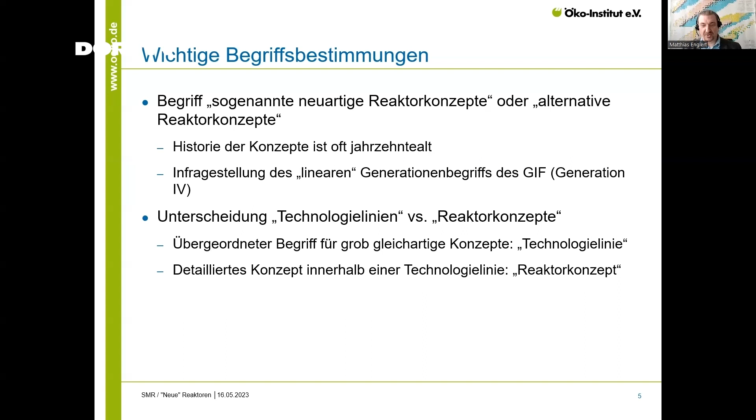We will distinguish between the so-called technology lines, which is kind of a headline, and so-called reactor designs or reactor concepts, which are very specific forms of reactors within a technology line.

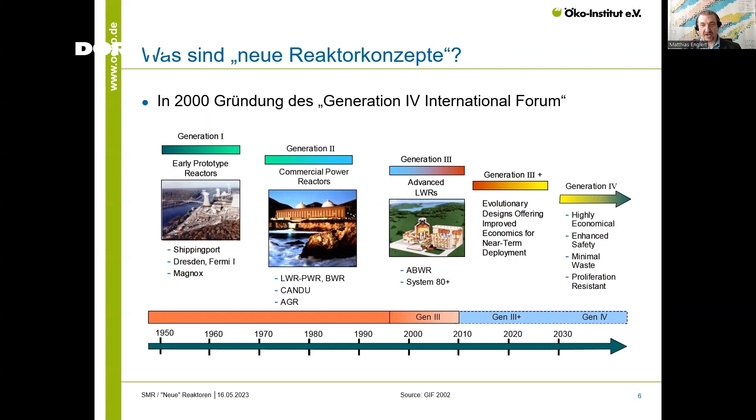Now, what are these so-called novel reactor concepts? Generation 4 was introduced by the Generation 4 International Forum at the beginning of the 21st century, and it was thought to be a development towards more economical, safer new reactor types, which actually contribute to disposal or come with lower disposal risk and are also proliferation safe.

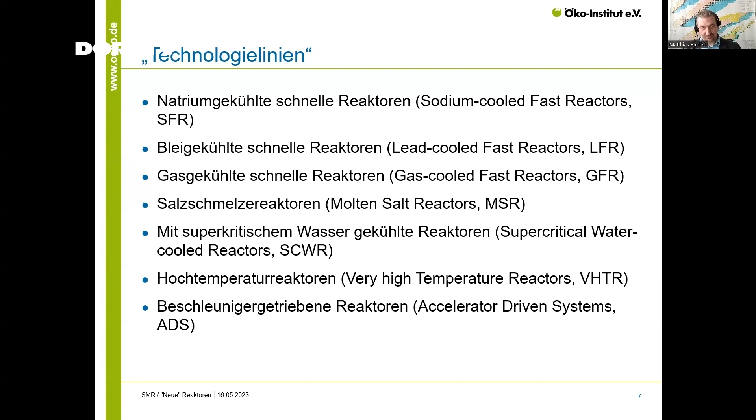This forum introduced the so-called technology lines: the sodium-cooled fast reactors, the lead-cooled fast reactors, gas-cooled fast reactors, molten salt reactors, supercritical water-cooled reactors, very high temperature reactors, and we also added the accelerator-driven systems.

And if we have a look at the idea of the generations, what we can see here is that we can't really call this a generation 4 reactor concept, because looking at light water reactors or pressurized water reactors, the first test reactors were followed by the first power reactors, power plant reactors, then refined power reactors, and then advanced power reactors, such as the AP1000 or the EPR.

And we can see the same in BWRs and PHWRs. Actually, we can see that hardly any of them have actually reached generation 2. They actually only made it to generation 1, that is, the initial power reactor.

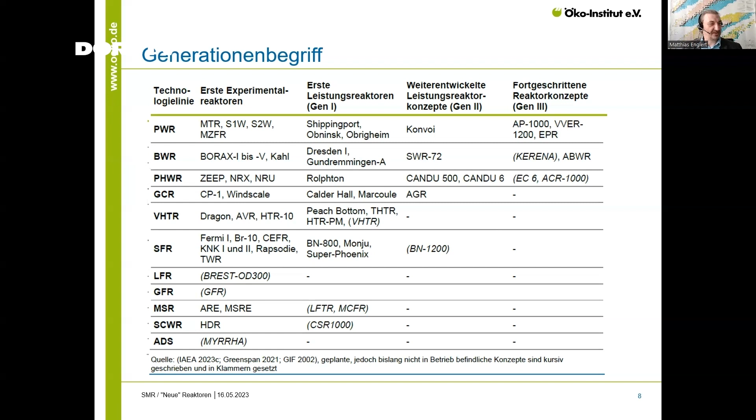So we decided that we would not call it generation 4, but we said we would talk about alternative reactor concepts. And if we look at these, we can see that there are breakdowns according to criticality, where there are thermal systems, what coolant is used, and we also introduced a couple of specificities, so we could actually find one specific reactor concept for each technology line.

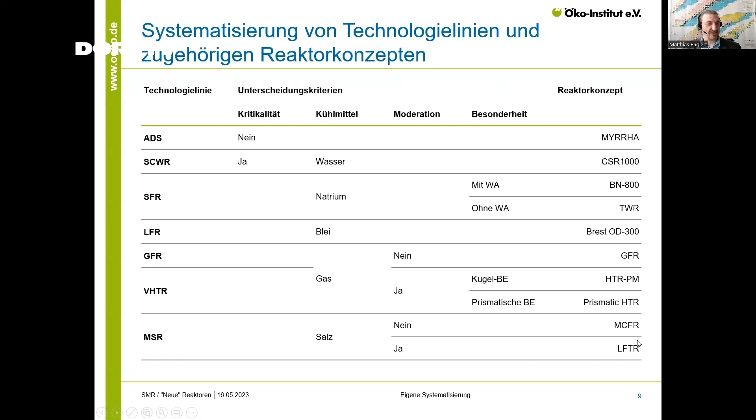We picked one, and you can see that in the right-hand column, and we looked at it in greater detail. Who is actually involved? You can see that here. The various technology lines are being worked on by various countries. The countries working on generation 4 are countries that already use nuclear energy.

What are the goals, except for those that I already mentioned? Of course, the optimization of resource utilization, as well as the optimization of disposal, cogeneration using process heat because of the heat produced by these reactors, and of course an improvement of the safety features.

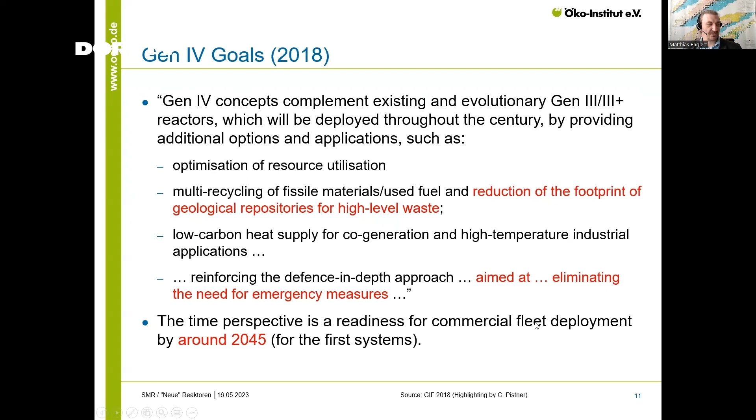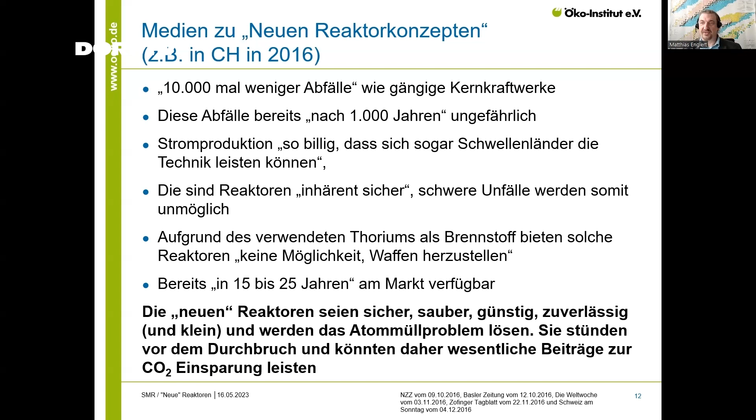And the Generation 4 Forum mentions that the time perspective for a commercial fleet to be ready is around 2045. The media have also presented information like 10,000 times less waste, cheap, so that even emerging countries would be able to afford it, proliferation resistant, and readily available in the market. So one can say these so-called new reactors are safe, clean, affordable, reliable, and small, and they will solve the problem of nuclear waste, and we are just on the brink of breakthrough.

As for the timeline, actually 3 development phases were discussed, and they are called viability, performance, and demonstration phase. But there are different types of terms we use. The point is that, first of all, you need to have a proof of principle. You have to make sure that everything works at all. Then there is the performance phase after the viability phase.

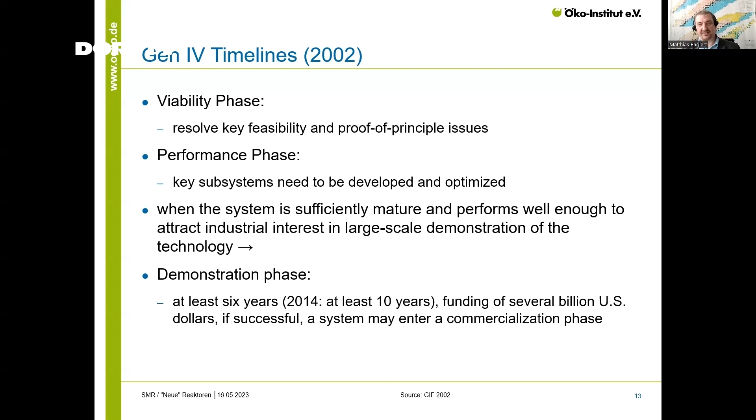Thus, performance phase is when you build test reactors and develop and optimize, and then once the system is sufficiently mature, the demonstration phase can start.

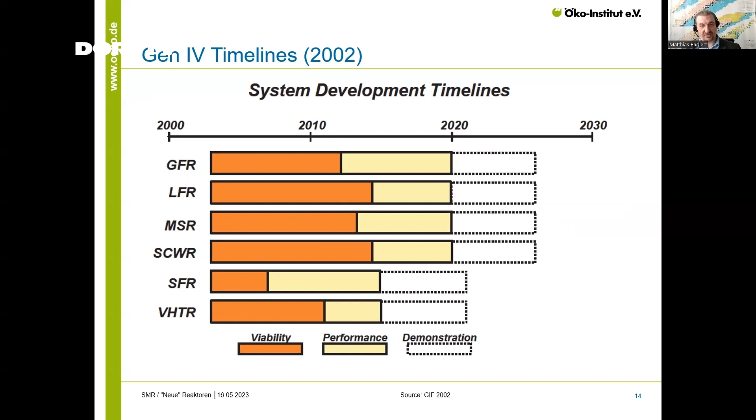In 2002, the picture was as follows. It was hoped that no later than 2015 or 2020, a demonstration reactor would be available, but this didn't happen. I can't really go into detail about all these technology lines, but we'll look at three in greater detail: the sodium-cooled fast breeder, the molten salt reactor, and the very high temperature reactor. And we'll check how far they have come.

Let's have a look at the sodium-cooled fast reactor first. This is a layout of the system with a primary sodium circuit, and there is a heat exchanger in the middle that drives a turbine, and the turbine then drives the generator, which generates electricity.

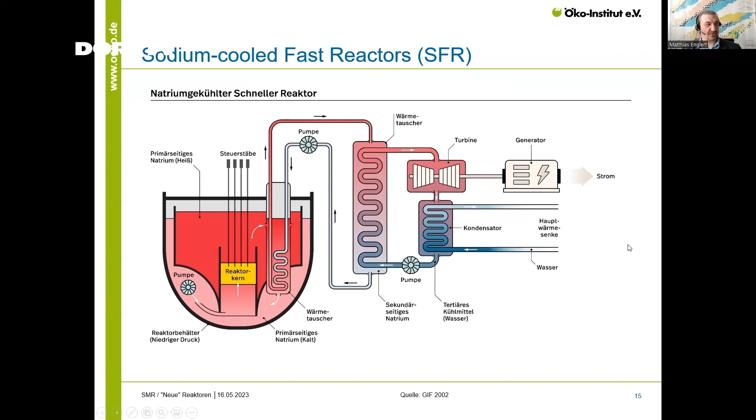And we have similar diagrams for the other reactor types. We also listed the benefits and drawbacks. Among the benefits are the better utilization of uranium, and the fact that low pressures can be combined with high temperatures. But the drawbacks are problematic reactivity control. There are positive feedback effects.

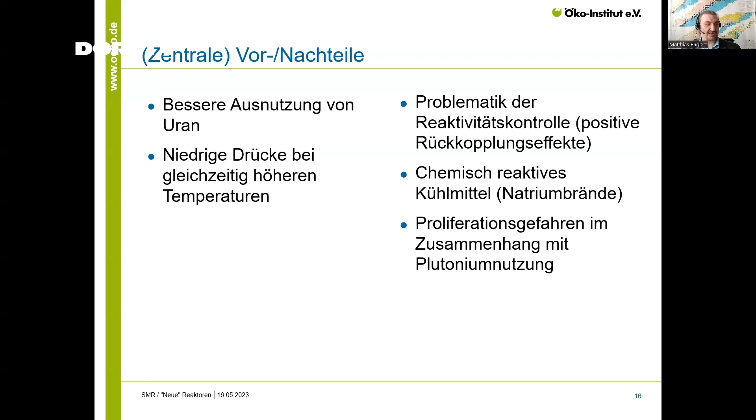Sodium responds exothermally. It's a chemically reactive coolant, which can lead to sodium fires, a problem that they got a grip on in Russia, in Russian reactors, but there is still a problem with the fact that a chemically reactive coolant is not as safe as a chemically inert coolant, which is used in other reactor designs. Moreover, we also have to say that most fast breeders, which includes the sodium-cooled fast breeder, are also discussed in connection with plutonium use, which comes with a proliferation risk.

We looked at the BN-800 for the study. It's located in Russia, and it's an 820 megawatt electric reactor with sodium as a coolant and MOX as a fuel, fast neutron spectrum. I can't really tell you much more about that reactor due to the lack of time.

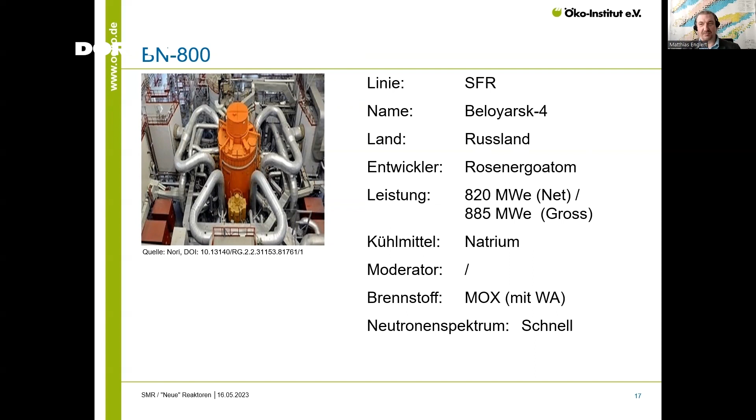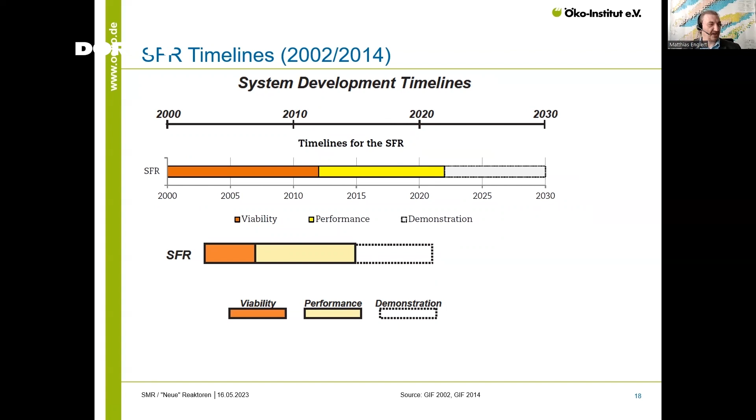One could talk a lot about the development and experience in operating it. But here's the timeline for sodium-cooled fast reactors. You can see it at the bottom, and this is the situation in 2014, and you can compare the timelines. You can see that in 2023, the first demonstration plant should be operating, and the BN-800 is actually a first demonstration reactor. It actually was commissioned.

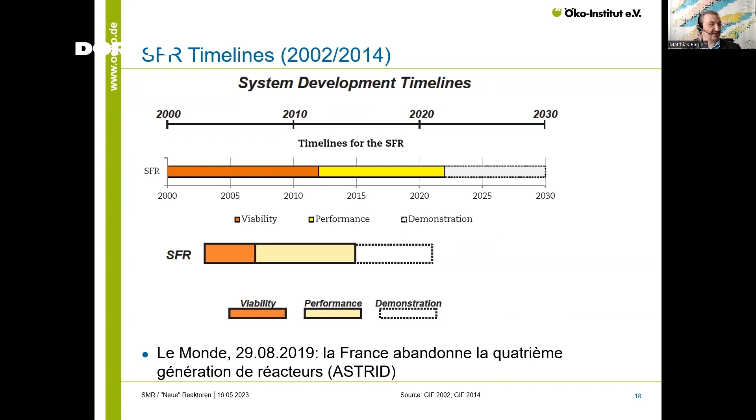However, in other countries, the situation was different. In Russia and China are the only countries that are progressing more or less fast. In France, the Astrid fast breeder development was stopped in 2019. And that takes me to the conclusions.

The SFR status is that there are more than 20 prototype reactors. They've been researched on for 70 years, but so far no commercially usable system has come about.

The Russian reactor is a first of a kind and has not been turned into a commercially utilizable reactor. SFRs are often designed as fast breeders, and this is considered to be a stepstone into the plutonium industry. In the foreseeable future, this will not be necessary because plutonium is not a scarce commodity.

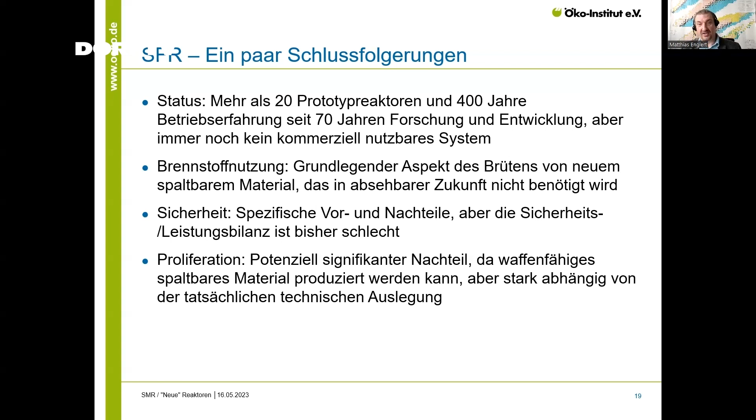As for safety, there are specific drawbacks and benefits, but the safety performance balance or output balance is rather bad. The output of reactors is not as good as expected. This could change in the future, so they could become more reliable. Proliferation is a very difficult issue because every fast reactor can produce weapon-grade material, depending on the design.

And this takes me to the very high temperature reactors, with graphite as a moderator, helium as a coolant gas. There are two designs, one with solid fuels in prism-shaped fuel rods and one as a pebble bed reactor.

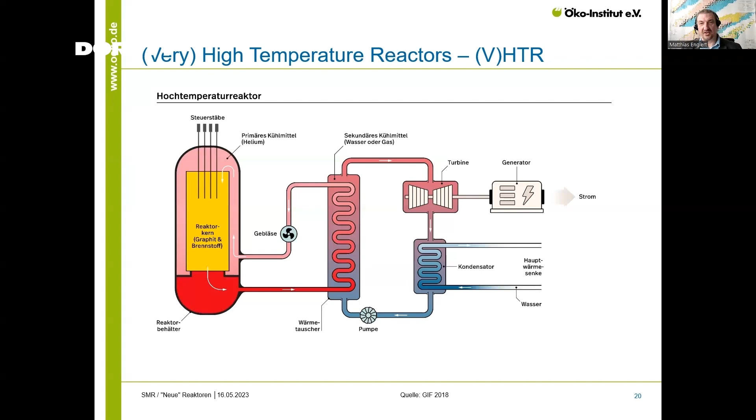And you can again see the heat exchanger, and usually this is linked up with a steam system, and gas circuits have also been reflected on to drive the turbine. The gas turbine has not really stood its ground. There were technical problems all the time.

The advantages and disadvantages: advantages would be the high operating temperature of coolant, which could be used as process heat. It also has strongly negative reactivity feedback.

Depending on the design, heat could also be removed passively, heat from the reactor core, and there is also an embedding of TRISO fuel particles, which has meanwhile become very good, and temperatures can go up to 1600 degrees centigrade. But there are drawbacks. The output has to be restricted to benefit from the passive properties.

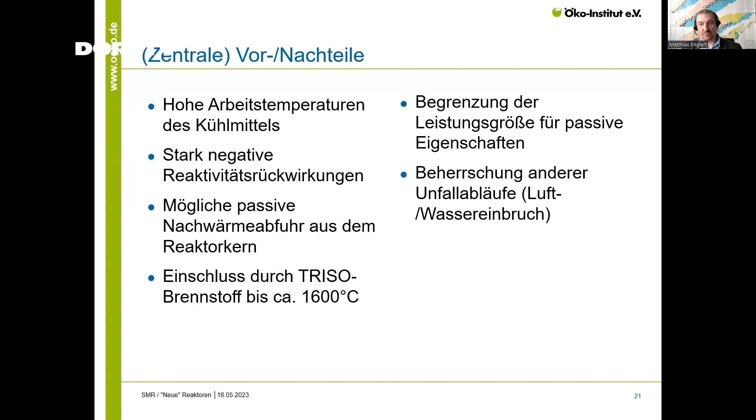Incidents cannot be controlled. It does not so much regard the greatest assumed accident, but rather water leakage and the like.

The HTR-PM in China is a good example. It's a combination of two systems being coupled and driving a turbine, and again the design was done in such a way that the passive safety properties remained. The output temperature targeted is 750 degrees Celsius.

There is no containment, and the neutron spectrum is thermal. You can see one of those spherical fuel elements, similar to the old type of spherical fuel element built in Germany, but improved using programs run, for example, in South Africa. But the entire principle is based on developments from Germany in the 1970s.

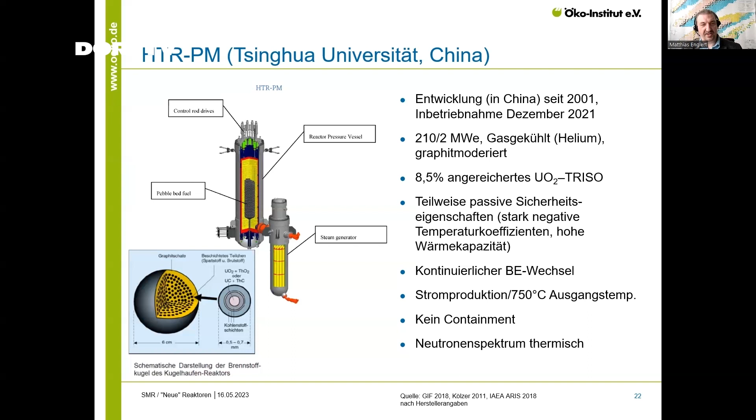The TRISO fuel can be seen as 3 layers in a graphite sphere.

Again, the timeline between 2001 and where we stand today, the HTR-PM was commissioned, and we can say that it is still in the demonstration phase.

The construction in China came with a number of problems, but it was completed rather fast. But now operating experience has to be recorded. We haven't found much about this in literature.

However, in principle, one can say that depending on whether you use the HTR-PM as a performance reactor or demonstration reactor, and I would say it's more of a demonstration reactor, it would be something to build on. A successor model would then be commercially viable.

Again, here are a few conclusions. As for the state of play, development has taken 60 years so far. There were ambitious programs which failed. A new attempt was made in China, and we will see where this leads.

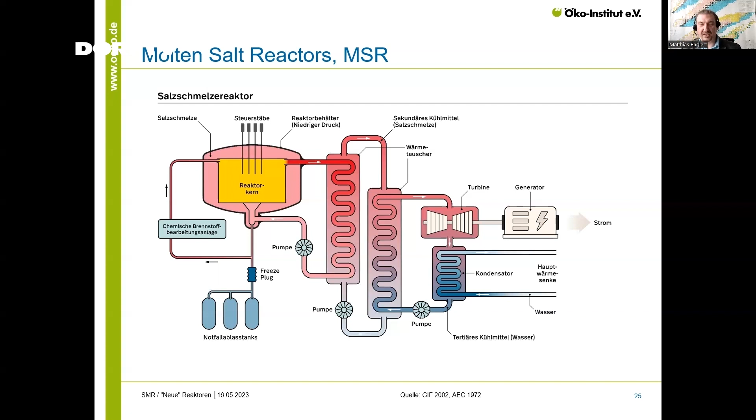But a secondary coolant circuit is used for salt melting, and then only in the 3rd stage the heat is then discharged, and the freeze plug would heat up and the molten salt would be discharged into tanks. The chemical plant for processing the fuel is also very specific, and it can be used for regeneration.

There are very many reactor concepts. There are not just molten salt reactors, there are different ways of using fuel. It's chloride salt melting and solid fuels and liquid fuels that can be used. So there is a wide scope of new developments.

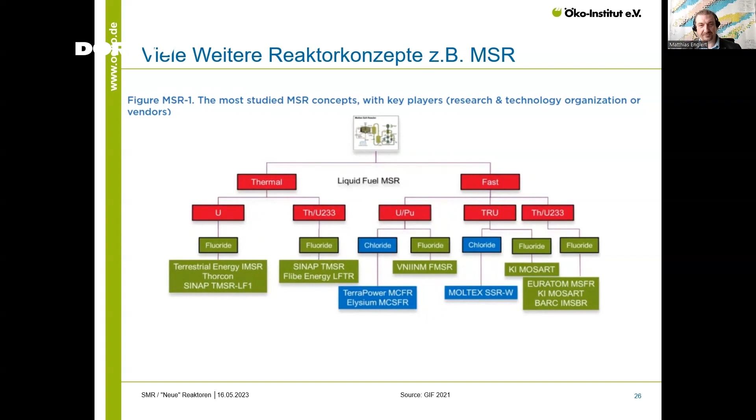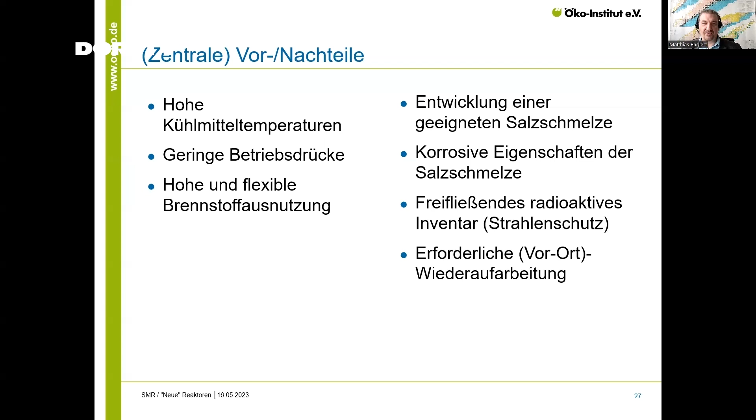Regarding molten salt reactors, in general, the benefits and drawbacks include the benefit of high coolant temperatures, low operating pressure, and flexible use of fuel. But the development of the salt melting process was quite difficult. There are also corrosive properties, and of course the radioactive material cannot be fully located, which is a problem for the conservative engineers.

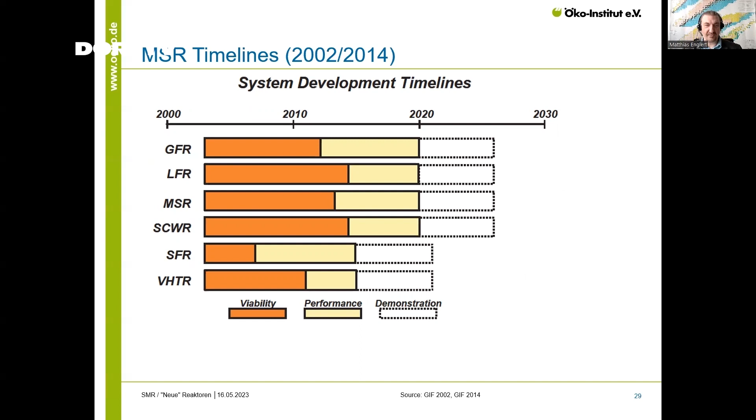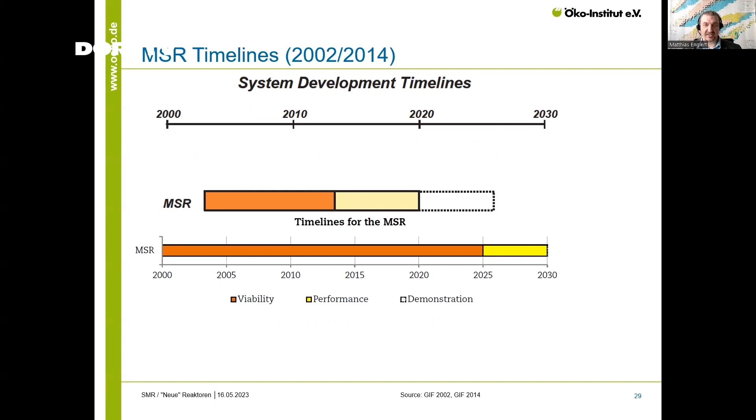We looked at the so-called MCFR from the United States, and it's a relatively early model. It's a molten chloride fast reactor in the United States developed by TerraPower. And when we look at the timeline, the demonstration reactor was supposed to be complete by 2020, and we are rather far away from that. It will take at least until 2030 for a demonstration reactor to be completed, and this target might also possibly be missed, but it will depend on the MSR that we are talking about.

And this takes me to the conclusions. Regarding MSRs, there were considerable efforts, especially in the 1970s, and then a revival after 2000, but a commercially viable system cannot be expected before 2050. There are certain safety benefits, but these also require considerable technological development, especially in terms of proof of concept and instrumentation, and radiation protection problems have to be considered.

As for waste, we have chloride, molten chloride salt, and various flows of waste and relevant nuclides. And again, proliferation is a problem because of the regeneration of fuel.

So this was a short insight into what these reactor systems are about, and I gave you a number of examples. I would now like to briefly talk about SMRs. We also have an opinion on that, a report on that. One of the problems is the definition of SMRs. Often it is said it's an advanced system with electric power up to 300 megawatts, designed to be built in factories and shipped to utilities, or built in a modular system.

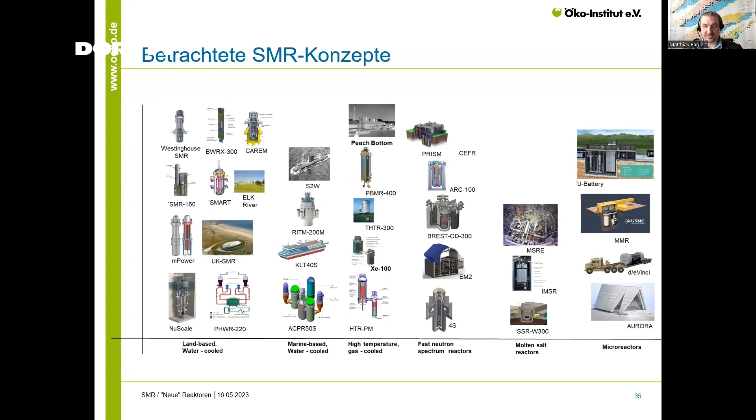Eventually we came up with a definition that has to do with the output, 300 megawatts, and we looked at various SMR concepts. For example, the land-based systems, the maritime systems, the high-temperature systems, the fast neutron spectrum reactors, the molten salt reactors, and the microreactors.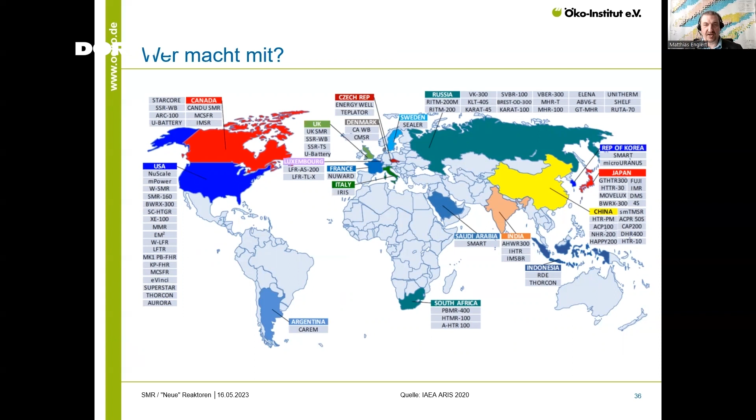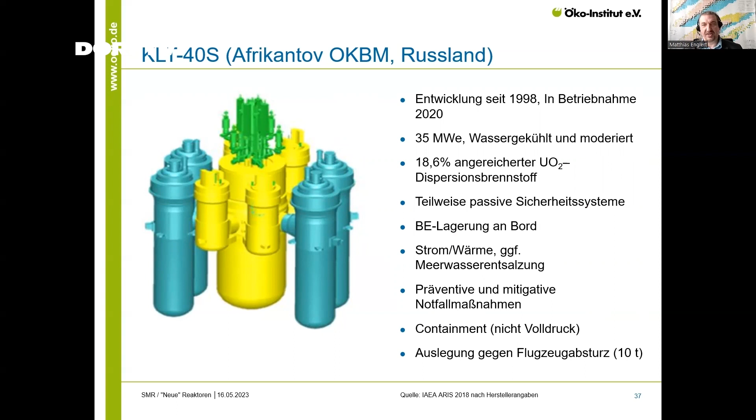Who developed these? Basically the same countries that are active in the Gen 4 forum, plus a few others. For example, the KLT-40S from Russia, which has been developed since 1998, commissioned in 2020, 35 megawatts, water-cooled and moderated, with partly enriched uranium dioxide dispersion fuel, passive safety systems. It is also designed to withstand aircraft crash, but doesn't have a full pressure containment.

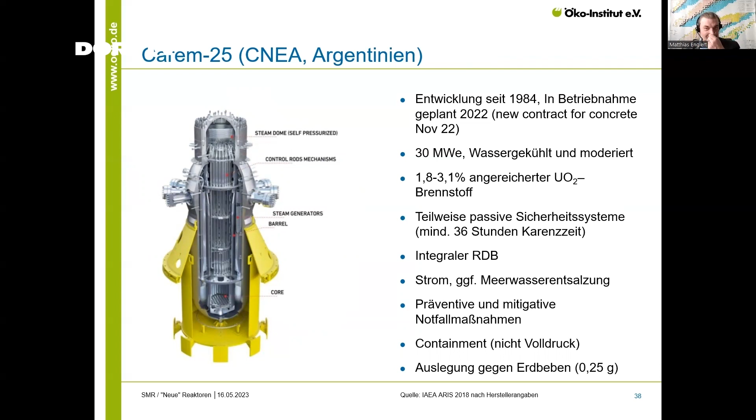And we looked at a few other reactors, such as the CAREM-25, which was supposed to be commissioned in 2022, but I read that a new contract for concrete work is now being entered into.

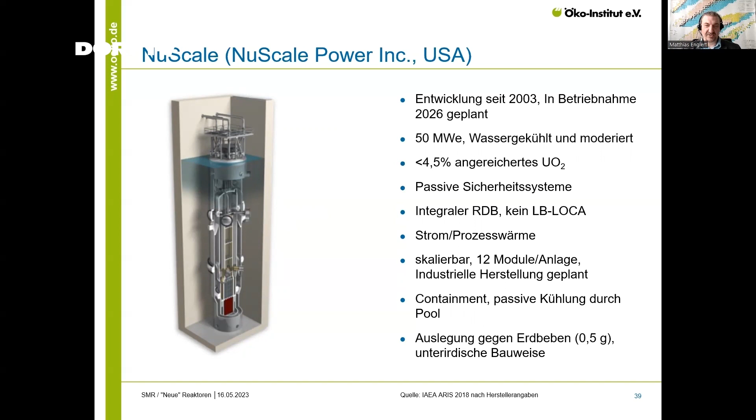And the new version that is being discussed in the US is the NuScale reactor planned for 2026 to be commissioned. In principle, it is based on the light water reactors, and this is the system which must be most credibly used in the future, must be scalable, 12 modules per plant, and should also be able to be produced on an industrial scale.

The plans for SMR development are actually very broad, based on use cases: off-grid, district heating processes, hydrogen, seawater desalination, fighting climate change, and also using it in remote areas. Often it has been said that due to the fact that higher numbers can be produced at industrial scale, electricity can be produced at very favorable prices. Safety and security properties have improved because it only contains minor volume of radioactive modules, and simplification is possible. These are the proclaimed goals of SMR development.

Apart from that, from a technical point of view, the difference is based on size when it comes to advanced or alternative or so-called new reactor systems. Here you can say that for all larger reactors of the technology lines, there is also a so-called small system development. This brings me to the discussion and then the conclusions.

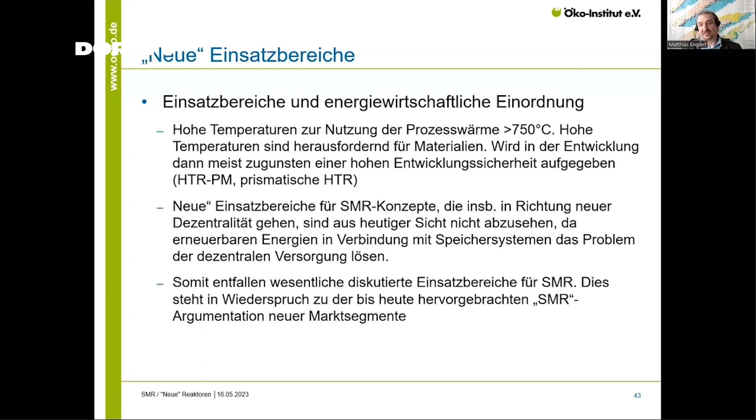Other areas of application for the SMR concepts include the fact that they can be used in a decentralized manner. Other renewable energy systems with a storage solution could also solve this problem in the same way, often due to high development reliability or due to alternatives. These concepts are then no longer pursued, which is in clear contradiction to the argument that modular reactors or new reactor segments could open up new market segments.

When it comes to protection, the development and construction period takes at least 25 years to ensure these new systems can be implemented. Generation 4, for instance, according to GIF, will only be introduced at commercial level in 2045, which is much too late for climate protection, particularly for SMRs.

You need to ask yourself how many, what high numbers, thousands of SMRs have to be built to replace the aging existing reactors or to make available the output required. How realistic is a development scenario involving thousands or tens of thousands of such reactors? Not a single SMR concept...

...can lead us to cost reduction expectations, because it is said that due to standardization this will lead to economies of scale, for instance, which will lead to cost reductions. The modular structure should also lead to higher productivity levels, but based on our analysis, we can see that it cannot be expected that the disadvantage—in other words, small performance being more expensive than high performance—can be compensated for by these economies of scale.

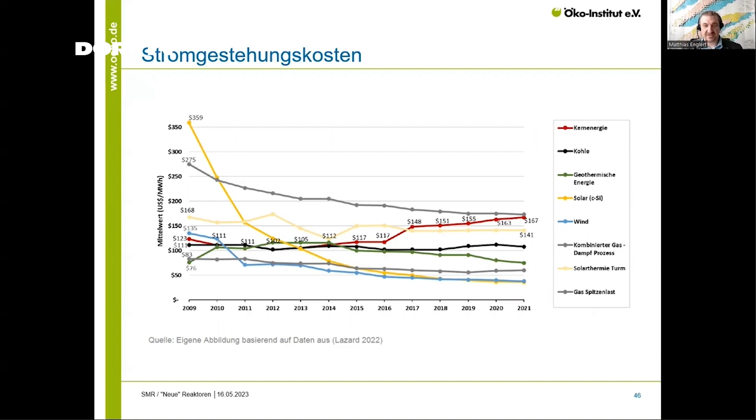For many years we've seen the same picture for electricity construction costs: nuclear energy is getting increasingly expensive, while solar and wind energy is getting cheaper. So the gap is widening, and it cannot be expected that the cost increase trend observed with nuclear energy will be reversed.

Particularly in the startup scene, we haven't seen any new companies that could achieve any disruptive effects. Mainly private-owned companies used state-funded programs when it comes to funding demonstration reactors, and they always fail because they cost several billions. Even smaller startups use a 'fake it till you make it' approach, making highly unrealistic promises in terms of timeline, saying everything will be completed in 10 years. Yes, this is maybe necessary for them to attract private investors, but it is not realistic.

In the nuclear area, there's always this hope for a new Tesla, a new SpaceX, but the technology is completely different because there is no leeway for errors. You cannot just have a reactor explode in order to test how it works and learn from your errors. This doesn't work in the field of nuclear technology, because as soon as radioactive radiation comes into play, you cannot do anything at all.

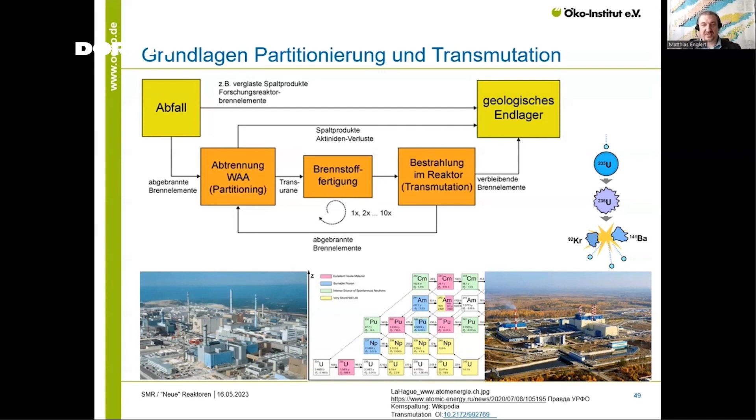Transmutation is another concept frequently voiced in the context of so-called new reactor systems. The idea is that critical isotopes and elements are taken out of the waste and then irradiated, so they are no longer dangerous for final storage—so-called transmutation reactors, so-called fast reactors. They always show this chart according to which, if you would treat the radioactive waste by taking out the transuraniums—these are the lines—then just the fission product remains.

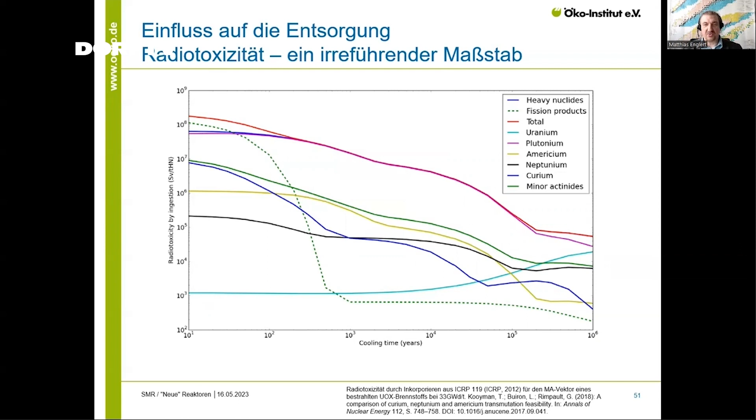And then you transmute them, and after a few hundred or thousand years, toxicity is so low that it would not be hazardous at all. But this is most misleading, because in the final storage it is the long-term products that are there.

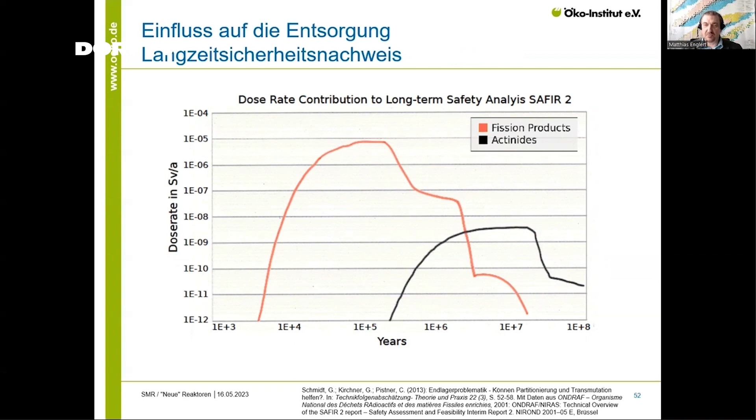This brings me to transmutation: molten salt reactor systems would actually be the best for transuranium transmutation. But so far only mixed oxide fuels can be used, and all new transuraniums except plutonium development are still at laboratory scale. It doesn't generate much benefit, because transuraniums are not decisive for final storage—it's the mobile fission products that matter.

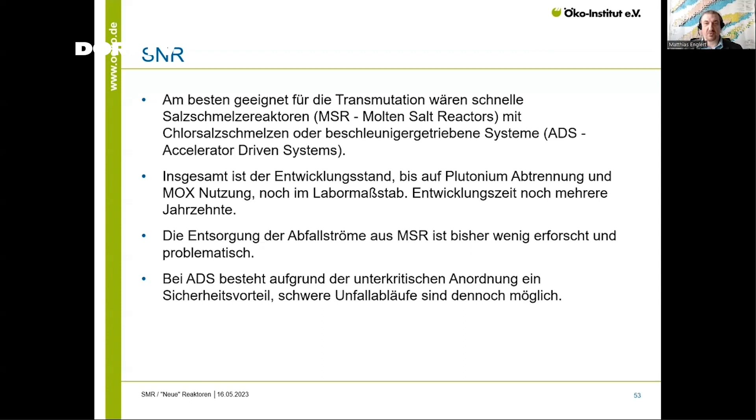So for molten salt reactors, they have very special problems because of the molten salt. And summarizing, you can say, and this holds true for the scenario in Germany, without using nuclear energy, but just to use it to treat waste, this would involve major efforts. At minimum, this would require 100 to 150 years.

Well, efficiency is only limited because you required final storage, major burden. So the reduction is low, as mentioned before, and the problems of the usage of nuclear energy will stay. You shift the responsibility and safety for waste disposal to future generations.

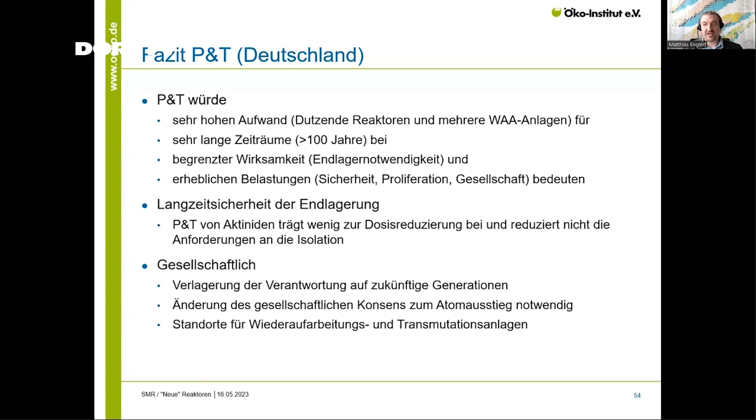The phase out, well, in Germany means that what we consider, it is a special topic, but I just wanted to highlight that when it comes to safety issues, I could say it is not the system that would solve the safety issue for nuclear power plants.

So far, for small modular reactors, they want to achieve today's safety level or even excel, but this proves difficult based on this technology to make a general statement, because in principle you would require a specific system for analysis, and in the context of the studies we use 10 of these reactor systems, but actually it's not so easy because the level of specificity is too low in order to make clear statements.

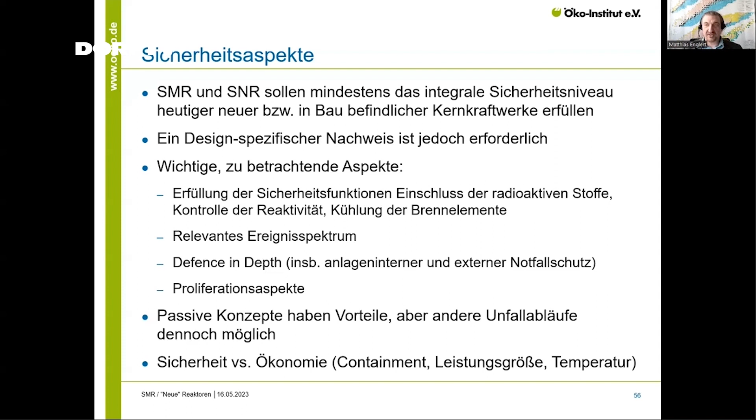So a wide number of safety features need to be considered. Generally, one could say that passive concepts actually do have their benefits, but other risks are always there. And what we see is that they always want to strike a balance between safety and economical aspects. Lower radioactive inventories are then offset against small containment or other topics.

In terms of proliferation, one could say that non-water-cooled systems where there is higher uranium enrichment or the use of plutonium fuel as well as reprocessing technology, this has a fundamental detrimental effect on proliferation resistance. So some SMR concepts envisage a long operating timeline, but there's always the issue of proliferation.

And monitoring is always very important. And then, well, how real, how implementable are these things? So reactor concepts have been in development and in use for so many years without seeing a broad-based introduction of the system. The new timelines that have been shown, well, they all start in the year 2000, but actually it started in the 1960s, 1970s, and lots of these new introductions have failed time over.

Just think of the SMR, just think of the German nuclear high-temperature reactor. These concepts have been known for many years, but they have not been rolled out on a broad base. And if this topic was so successful, then you would expect a favorable mood in society with respect to the usage of such nuclear systems in Germany, as is, for instance, the case in France.

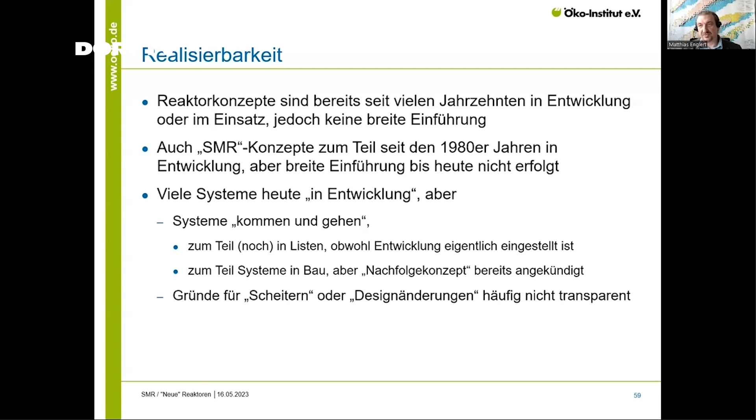And the reasons for failure or why such design changes have been implemented are not so clear. So you really have to look into the detail in order to find out why developers have implemented these changes, or changed the design, for instance, modified the design.

When it comes to implementing the technology lines of the so-called new reactors, the furthest progress has been made with breeders and high-temperature reactors. And with the SMRs, you could say that only the water-cooled systems that can use light water can be realized within the immediate future.

When it comes to realizing non-water cooled SMR concepts, they always promise fundamental innovations, but there are problems associated with it. The higher operating temperatures, for instance, they say that they open up higher efficiency and fields of application, but this involves more development efforts.

Many say that closed fuel cycles can be used, but this is associated with high technological risk. New fuels need to be developed, or reprocessing technologies need to be developed that have not been used at large scale today. Also, some different security and proliferation risks emerge, and then you have to counter these risks by development efforts.

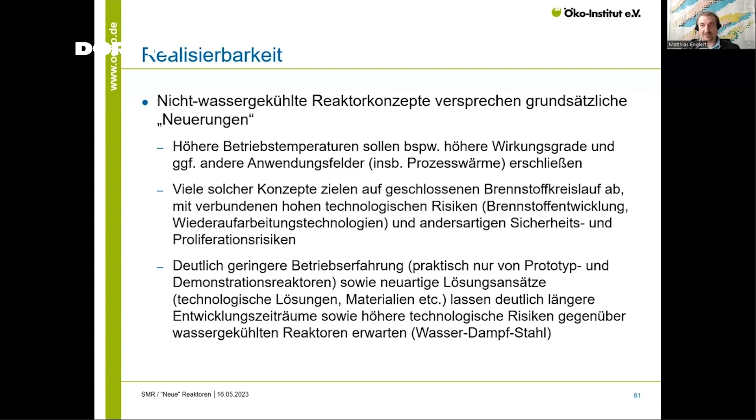Operating experience is low, and these involve novel solutions in terms of technological solutions or materials. This means longer development periods can be expected, which goes hand in hand with higher technological risk compared to further development of water-cooled reactors. Put differently, the water-steam system is one people have understood for the last 200 years. With lead or sodium-cooled systems or molten salt reactors, we do not have so much operating experience, or experience with the materials or the interactions.

This leads me to my general conclusion, the conclusions we drew in the context of our work.

The principles of these technology lines, with the exception of accelerator-driven breeder systems, have been known since the 1950s, and nevertheless these concepts have not been successfully further developed by the so-called new reactor systems. We believe the Gen 4 term is faulty - it could be called Generation 2B, but not Generation 4.

So why were these systems developed? On the one hand this had to do with innovation policy, but also with geostrategic objectives, which we also see in terms of the Russian reactor program.

In terms of the organization models, one can say that from today's point of view there is no immediate breakthrough foreseeable. Neither industry groups nor the start-up scene succeeded in achieving a breakthrough.

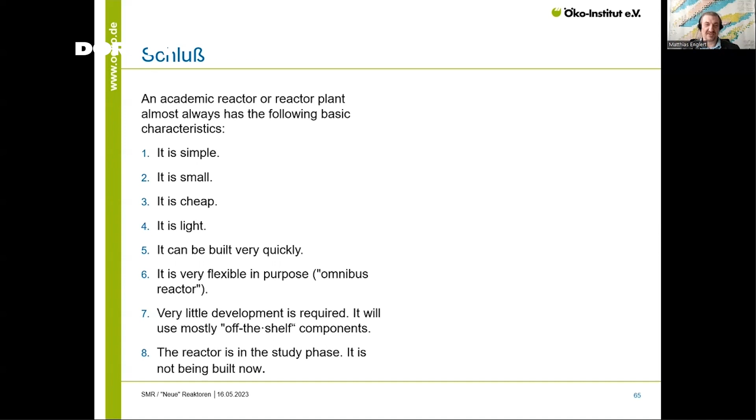And the reactor is unfortunately only being studied and has not been implemented yet. The actual reactor currently being built is always behind schedule. It requires massive development efforts for some trivial problems like corrosion, for instance. It is quite expensive, and it takes a long time to solve the engineering and development problems. It's large, it's heavy, and it's highly complicated. This quote is from 1953, and it is still true.